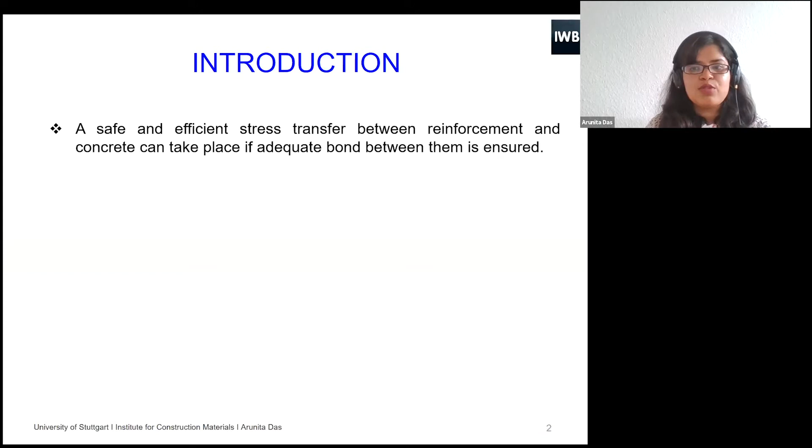So to start with the topic, as we all know, for a safe and effective transfer of stresses between reinforcement and concrete, there should be an adequate bond between steel and concrete. But sometimes reinforced concrete structures are subjected to several accidental hazards, such as fire, and in that case the bond between steel and concrete is heavily affected.

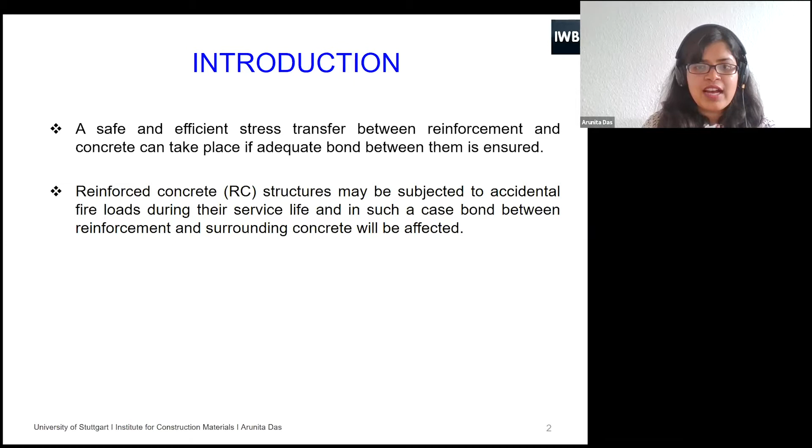Till date, in several codes and standards and guidelines, the bond between steel and concrete in ambient conditions is very well established, such as in FIB Model Code 2010, Euro Code, and ACI Code, everywhere it's very well established. But the bond between steel and concrete after fire, how to estimate the residual bond capacity, is still lacking.

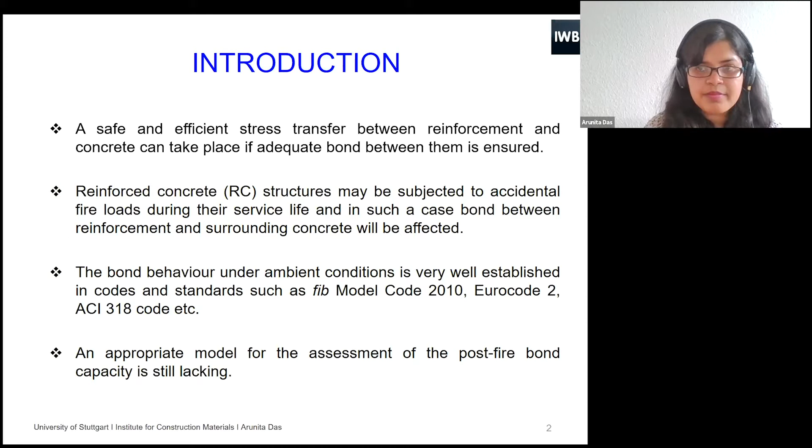If we go quickly through the literature on what previous researchers have done: Morley and Royles considered hot and residual states in case of stressed and non-stressed conditions, and they concluded there is insignificant difference in bond degradation between hot and residual states.

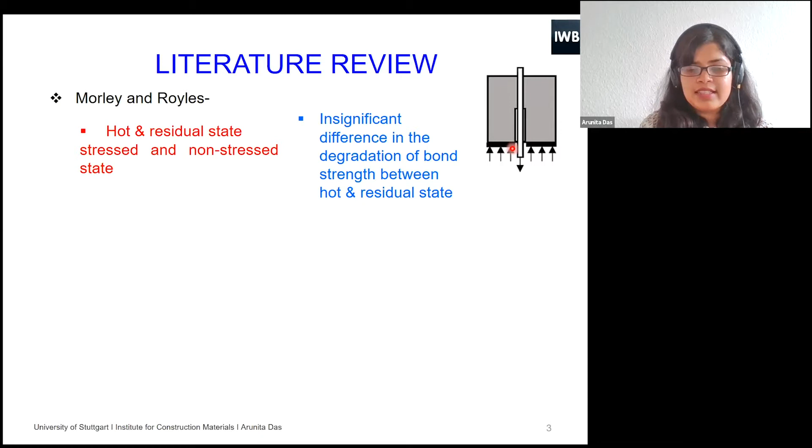Later on, Hertz, Diederichs and Schneider, Bingöl and Gül, Lublóy and Balázs, all considered normal strength concrete and concluded that bond degradation is roughly comparable to the compressive strength of concrete. All of them considered pull-out specimens and confined test setups.

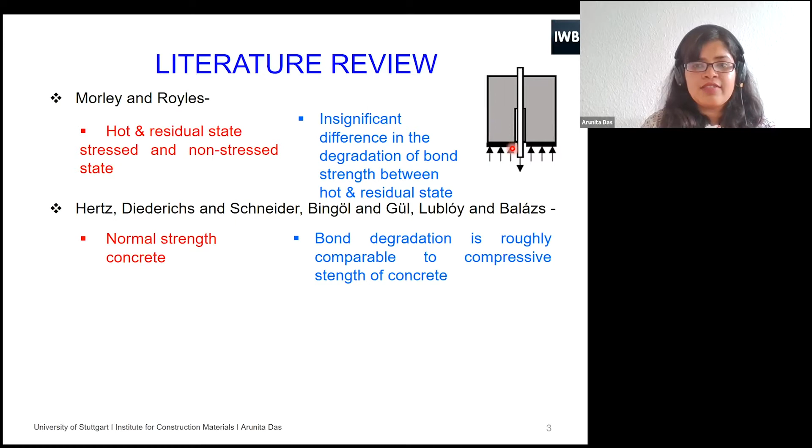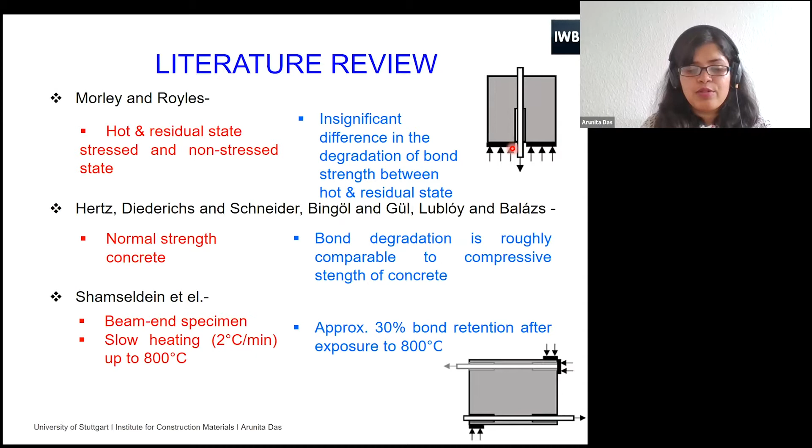Shamseldein et al. were the first to introduce beam end test specimens in case of fire, but they considered a slow heating rate of 2 degrees per minute, and concluded approximately 30% bond retention after exposure to around 800 degrees Celsius.

Recently, my colleagues Dr. Bošnjak and Dr. Sharma showed that using beam end test specimens and a realistic fire scenario, the degradation of bond is really huge, and the heating rate and type have a very huge impact on the results of bond reduction.

The study which I will show here is a step forward from the same study my colleagues did, but I will be considering several other parameters, numerical as well as experimental, and at the end of my PhD thesis I would like to present a model so that in future people can calculate the residual bond capacity after fire.

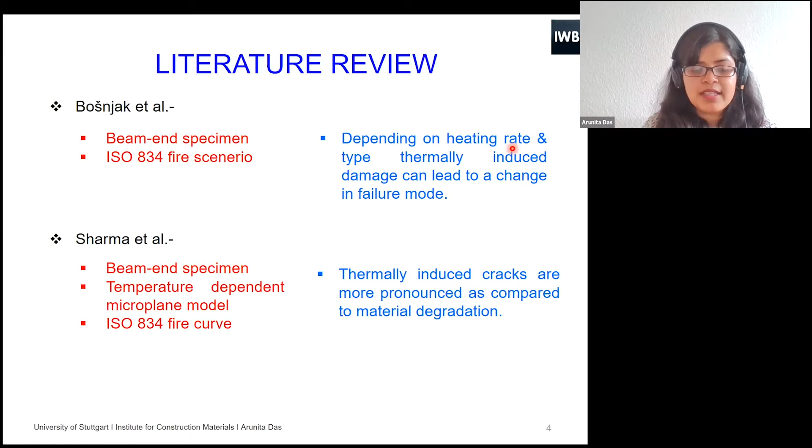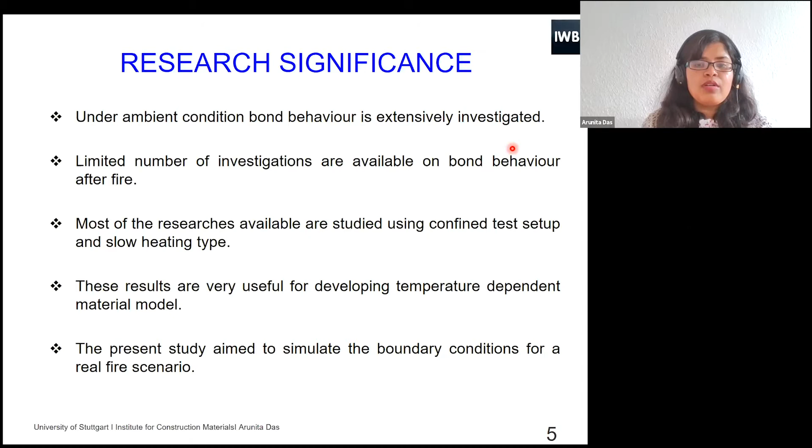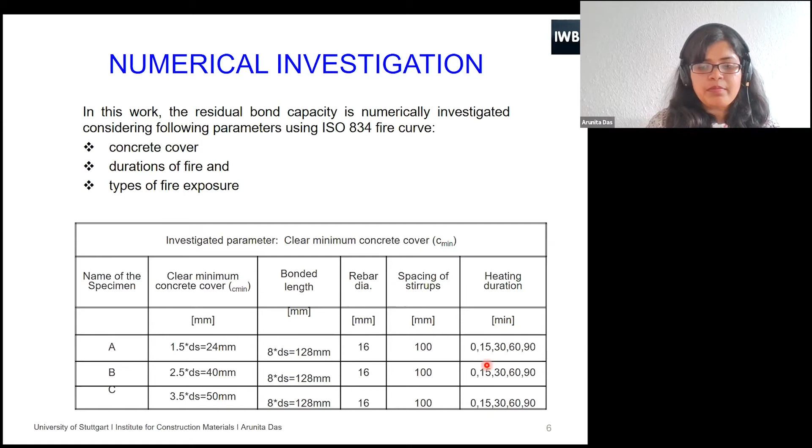This is the beam-end test setup which I have considered for this numerical investigation. This is not a pull-out test setup; it's a beam-end test specimen. You can consider it like a part of a beam which simulates well the boundary conditions of a full-scale beam. We could consider a full-scale beam, but it's very uneconomical sometimes and not very easy to handle. So we have considered the beam-end specimen, which is a little bit smaller in size, but which really simulates well the boundary conditions of a beam. It's economical as well, and it's very easy to handle.

So this is my test rebar. This is the bonded length, which is considered as 8 times the diameter of the rebar for all the numerical investigation. There is an unbonded length, or debonded length, initially a debonded length of 7 times the diameter, which is provided intentionally just to prevent a concrete cone failure of the structure.

Then this is the stirrups, which are given exactly in the middle of the bonded length, and there is a spacing of 100 millimeter from each side.

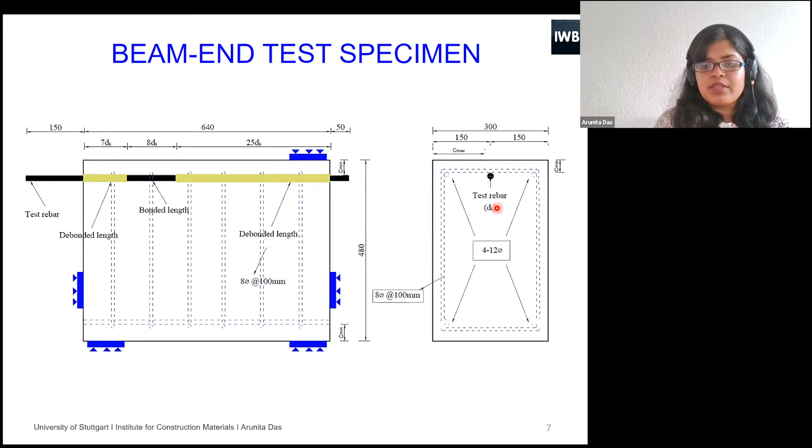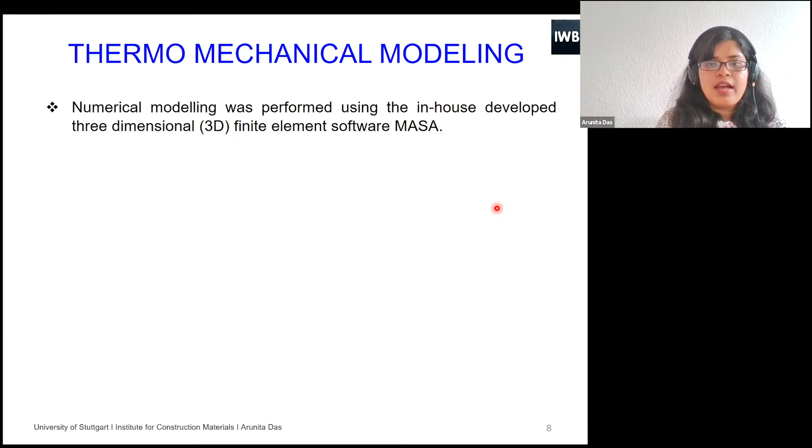So, thermomechanical modeling: how I have modeled the structure. All the numerical investigations are carried out using our 3D finite element software, which is our in-house software, called MASA. Here, a temperature dependent microplane model, proposed by one of our professors, Professor Ožbolt, is used as the constitutive law for concrete. The total strain of concrete at elevated temperature is decomposed into 3 components.

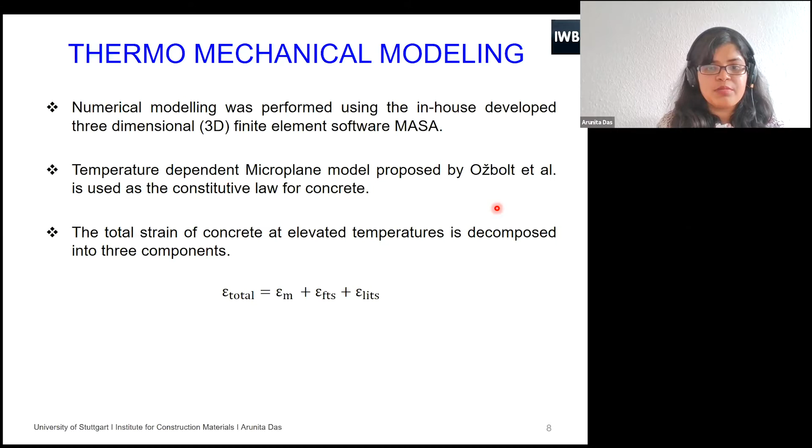One is mechanical strain, one is free thermal strain, and one is load-induced thermal strain. Then crack band method is used as a localization limiter, and a smeared crack approach is considered for the simulation of the cracks in concrete.

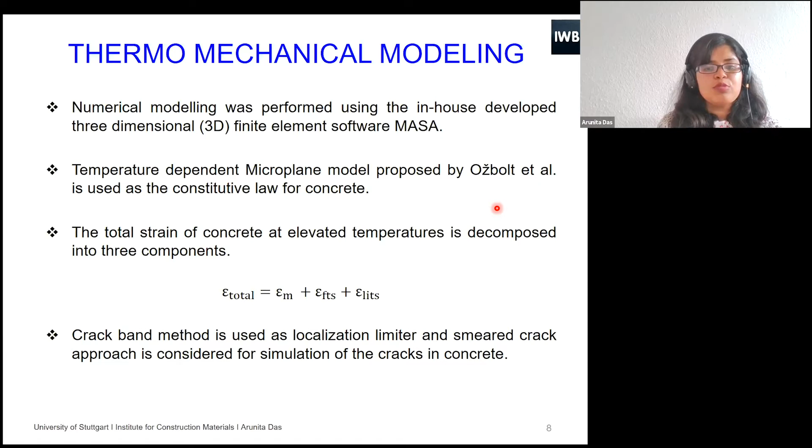So this is the modeling approach in case of bonded length, which you can see in this figure. This is the total test rebar. This blue portion is the bonded length, bonded zone, where the bond strength was considered 12 Newton per millimeter square. In this debonded zone, it's almost nothing, but in MASA there should be a minimum value, so we have considered 0.1 MPa. The slip is measured at the unloaded end, that is the rear end, and later on these bond versus slip values are compared. This is the typical bond stress slip curve which we have considered for this numerical investigation.

This is basically one idealistic pull-out bond stress slip curve which we have considered for this study. And this is the 3D finite element model which we are investigating right now.

So these are the restraints which I have already explained before. This is the top uplift restraint, which is there to prevent the uplift, and these are there to prevent the sliding, and this is there to keep the specimen in position. Specimens are being pulled in the front end, and slip is measured in the rear end. This is the heat, basically the fire, and this is the portion where fire is applied.

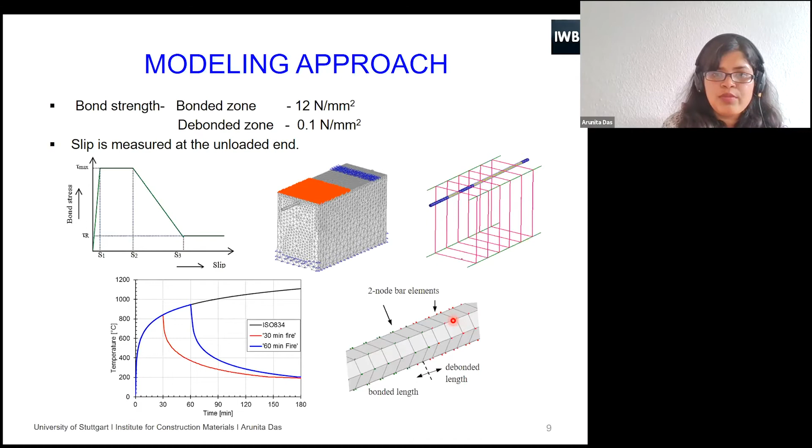So this is the 2 noded bar elements which we have considered in this bonded zone. That means these are the bar elements where we have given a bond strength of 12 Newton per millimeter square. And this is the debonded zone, here and here, where we have considered much less bond strength, that is 0.1 Newton per millimeter square.

So as I mentioned earlier, all the specimens were first applied the fire, and then the furnace were closed, and they were allowed to cool down for around 24 hours naturally. Then the furnace were opened the next day, and the specimens were taken out, and the pull out tests were carried out to check the residual bond capacity of the rebar.

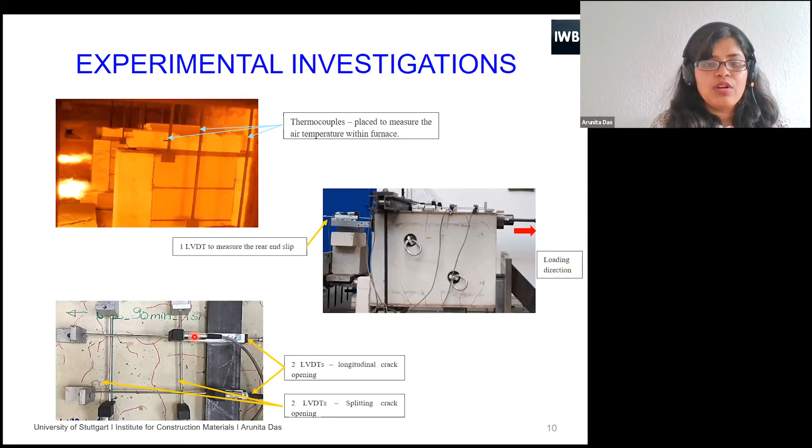Here you can see a closer view of that. So basically, there are 2 LVDTs which are placed to check the splitting crack opening, and these are the 2 LVDTs to check longitudinal crack opening. We placed 2 of each, and later we averaged the value of these 2 and considered that as the final value of crack width.

So yeah, in order to go to the results, you can see the bond stress versus rear end displacement curve which I have plotted.

These are the numerical results. You can see around 12 to 14 MPa strength we are getting, whereas even after 60 minutes of fire exposure, the bond strength has reduced a lot. You can see the bond stress percentage. Even after 15 minutes of fire, the bond strength has decreased to 60%. That means the impact on bond stress is really huge.

Here is the temperature variation inside the layers of concrete. You can see the top layer is around 550 degrees, while the bond layer, between concrete and steel, is around 170 degrees. So there is a huge difference in the temperature gradient.

This is what we wanted to capture. This is a very key point in our study, that the temperature gradient plays a key role. When the top surface reaches around 500 to 600 degrees, the bond surface is still almost cooled down, around 150 to 200 degrees. So there is a huge temperature gradient, which causes huge concrete cracking.

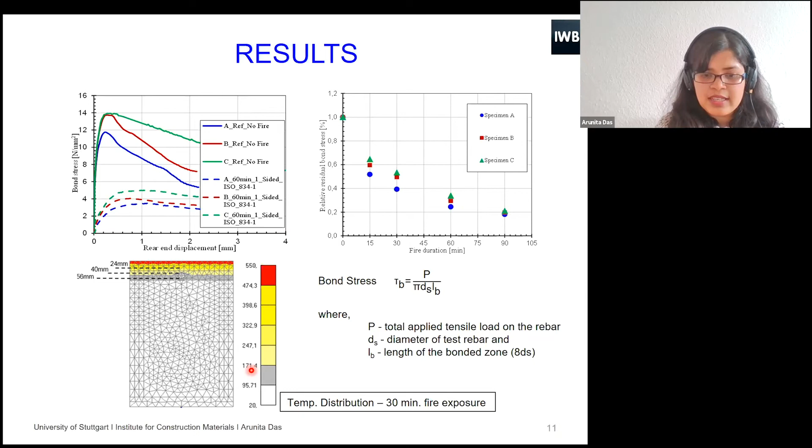Once there is a crack, the bond strength goes down drastically. So basically fire has a twofold effect: one is material degradation and one is temperature gradient. Material degradation alone cannot really show this effect, but due to the temperature gradient, we can see a huge degradation of the bond stress.

Here you can see the validation with experiment. These are the numerical models, these are the experimental results. There is a transverse crack that appears first, due to concrete tension failure, and slowly a longitudinal crack develops. So all the investigated parameters and all the specimens have failed in splitting failure, and we can see that all specimens get longitudinal splitting cracks here as well.

These are the reference specimens which were not subjected to fire, and these are the specimens subjected to fire. Here also we can see splitting failure, instead of pull-out failure, which is restricting the bond capacity. This can be explained only by the temperature gradients.

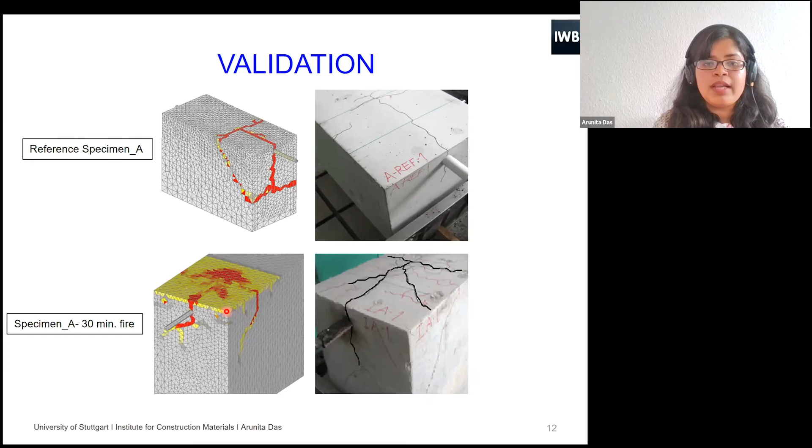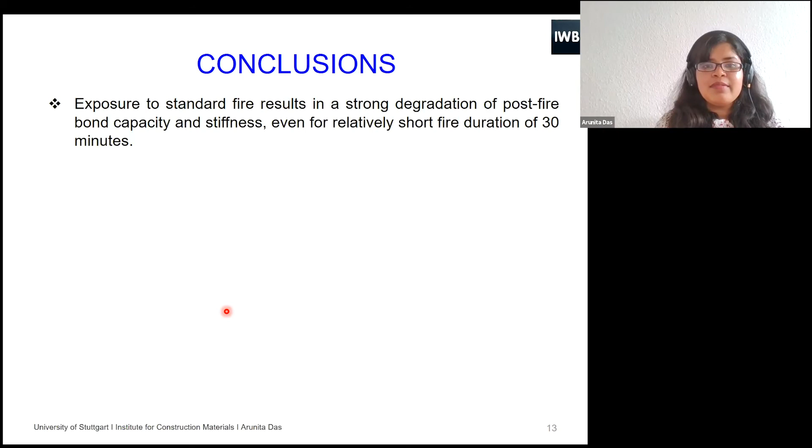So I will quickly go through the conclusion part. Exposure to standard fire results in a strong degradation of post-fire bond capacity, even for a relatively short duration of fire. This is basically due to the thermally induced damage, which is triggered by the temperature gradients. The effect of material degradation is also there, but it is not that severe. This is the basic difference between considering slow heating and considering the real fire scenario.

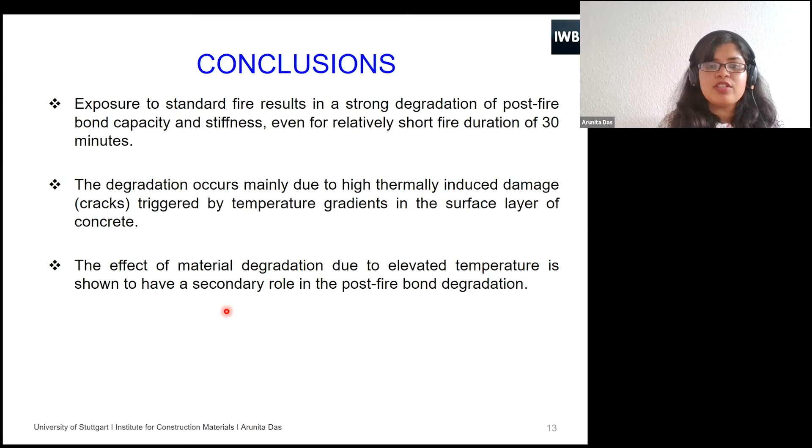In our case, we have considered an unconfined test setup, which simulates well the real behavior in a beam or a slab. So the effect of thermal cracking on relative bond degradation can outweigh the parameters that generally affect the bond.

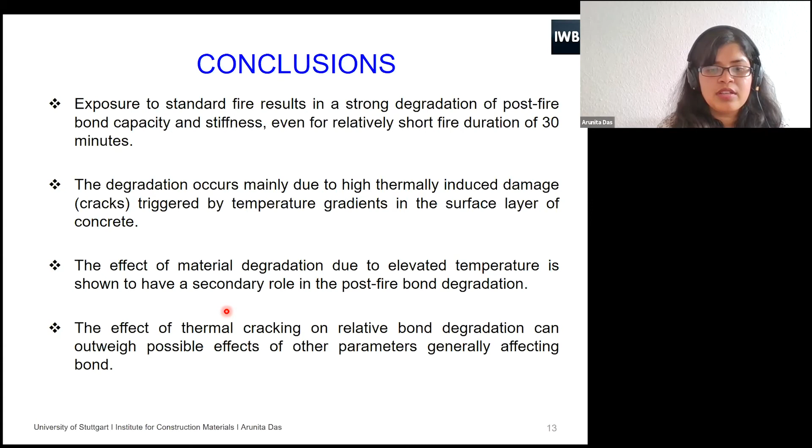After saying that is a good work, I would like to know the limits of the model you adopted. Which limits, in your opinion, do you have in the model that you adopted? What are the limitations you mean? Yeah, of the model you adopted.

Okay, one limitation is basically the bonded length. In our case, we have considered 8 times the diameter of the rebar, because we know that if we consider a longer length, say 20 or 30 times the diameter, then the bond strength is not uniform. In our calculation, we considered a smaller bonded length and calculated the bond stress by dividing the force by the surface area. If we consider a longer bond length, the bond strength is not uniform, and we cannot use this particular formula.

Basically, we are working on this bond length. Maybe in my next presentation, I will be showing some results on this bond length. So this is one limitation.